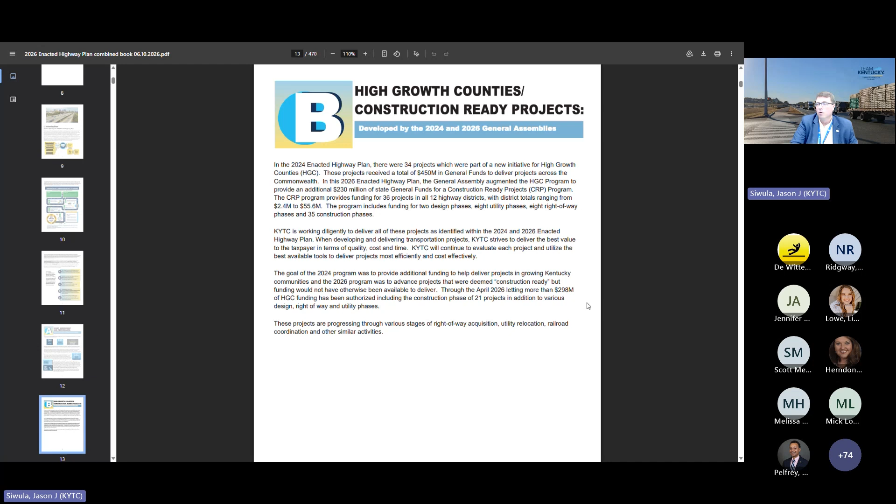The reason that's important is because those are dollars that are then able to be used in other ways to support other projects - the ones that would have potentially gone to delivering those projects. These are really important things to keep in context as we're talking about what's available to deliver highway plan projects. So in the system improvement area, one thing I want to call attention to is that everything here that's not a new project went through the SHIFT evaluation.

It went through the sponsorship process, it went through the scoring process. And one question that was asked commonly is: well, if a project wasn't sponsored, why did it end up in the recommended plan? So I want to talk about that for just a second with this group.

As we talk about sponsorship and all of those different things, that's very helpful not only for the cabinet but for the General Assembly to understand what the top level priority is for each area that does sponsorship. However, many of the projects that don't get sponsored were added through the legislative process, and so those are continued in future plans and carried forward to make sure that none of those previously identified projects were lost.

As the cabinet and the General Assembly continue to work on future highway plans, we're hopeful that things that maybe have been around for a while but are no longer local priorities or local needs can be addressed and removed from future plans. But I wanted to say that this portion of the plan is heavily influenced, and the delivery of this portion is heavily influenced, by all of those local and regional conversations that happen throughout the SHIFT process.

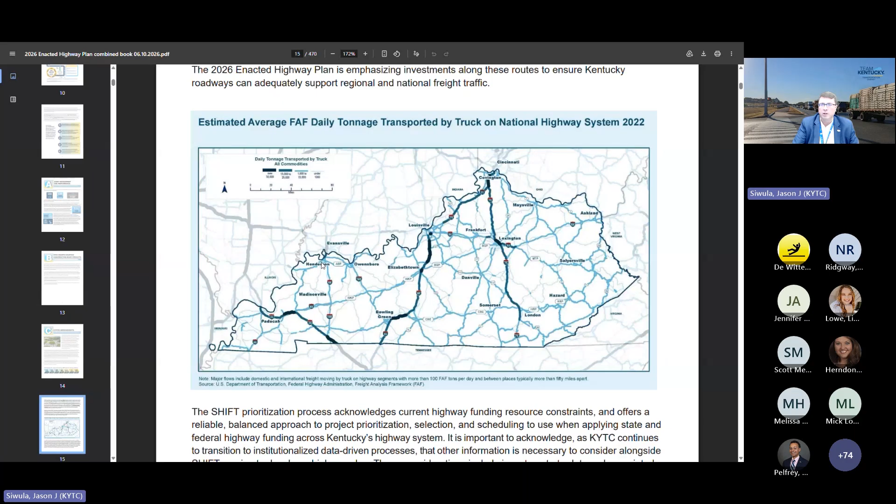I wanted to call attention to this map here that was put into this year's highway plan. A lot of what we talk about from a planning perspective is looking at not only vehicular travel, but all modes as far as pedestrians and cyclists, and also freight movements. This freight map was added to the highway plan to help explain where we have lots of freight moving, and help inform some of the decisions that have either been made recently relative to interstate and parkway expansion, or future decisions we're working on making there. So just wanted to point that out as well.

So the Z various funding area here within the highway plan is ultimately the things that we do that are either programmatic in nature, so think like HSIP, or our statewide funding for removing barriers to accessibility through ADA, but also things like rock falls that are not enumerated project by project, TAP, ITS, CMAQ. So all of these different types of things fall within the Z various program.

I'll make mention that this year, as an addition to this program, was a project that looked at how we address needs on state-owned and maintained dam infrastructure here in Kentucky, things that either affect transportation that we own, or things like roads that are on top of dams. So we did a study through planning over the last couple of years that looked at all of those assets and identified what future needs would be.

This project was added as a result of needing to address some of those things that were found through that study. So planning in action. Appreciate all of y'all for that.

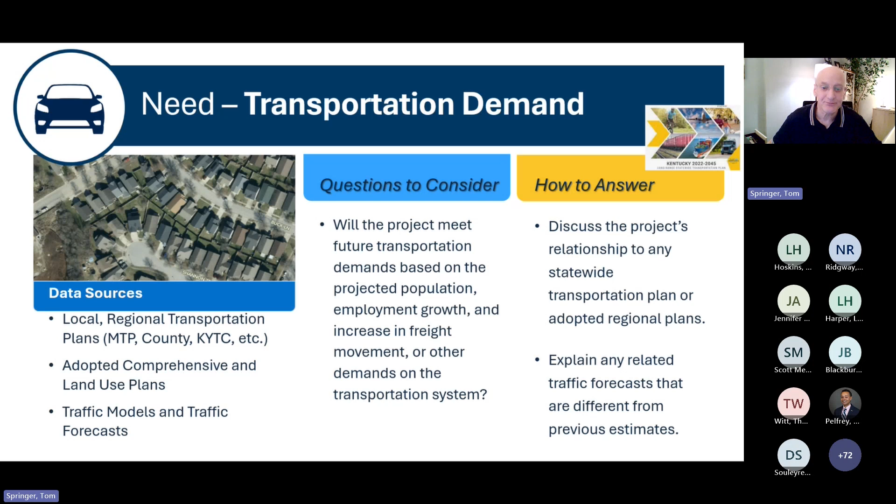So an example would be the purpose of the project is to provide intersection improvement along US 60 to meet future traffic demands along the corridor. In 2025, the MTP, LRTP state that all 23 signalized intersections along the road corridor need to operate level of service C or better to meet the demand.

It's based on population and employment growth. Estimate all this up though. That's not a real project example.

Sometimes it's real, right? Like that's the purpose of building the road, is we're going to open this area up for development. And if it is, it is. But going back to the previous one on transportation demand, it's like development's going to go here, so we need to build the road. So it's a little chicken and the egg. It can get confusing, but this is one where you seek guidance and you got to be very careful about it.

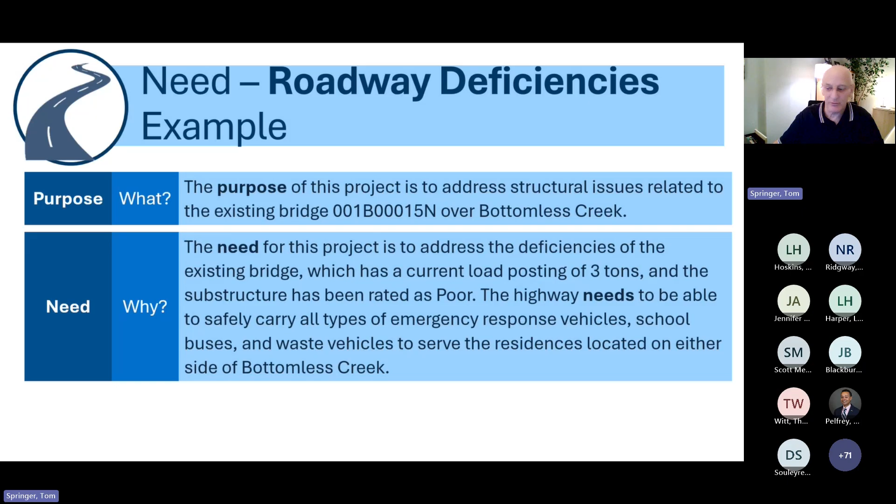And then the need, of course, would be the ratings that support that. All right, so I'm trying to jump through these because at the end, I really want to make everybody aware of the policies that are available.

Well, that's ubiquitous. That's every project is pretty much in that, right? So that is not legislation as a need, just because it's in the highway plan. Legislation should be reserved for very unique projects that have specific legislation toward that project.

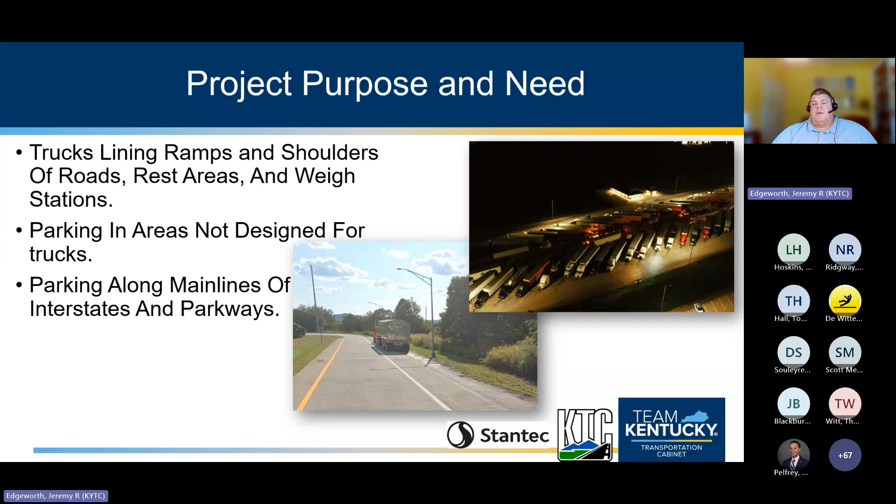So to talk about our truck parking problem, unfortunately, scenes such as these are all too common nationally, and Kentucky is not immune. As you drive down our roads, especially in the evenings or early mornings, you'll find trucks lining the ramps and shoulders of our roads, rest areas, and weigh stations. They are also parked in areas not designed for trucks, such as the passenger car areas of the rest areas. Often the parked trucks extend onto our mainline interstates and parkways, causing congestion on the ramps as well as safety hazards for truck drivers and the traveling public.

In fact, back in December near our Woodford County rest area, we sadly had a fatality with a vehicle crashing into a truck parked along the interstate shoulder.

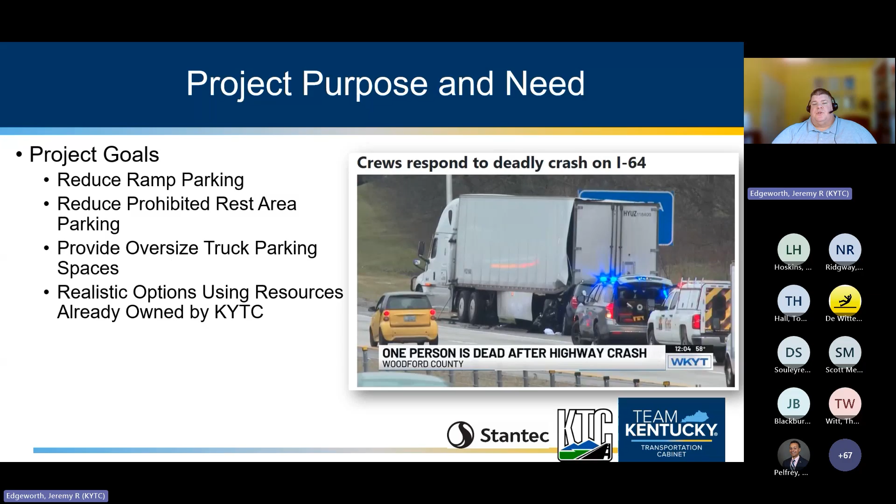Unfortunately, Kentucky buying acres of land and paving them for truck parking is not financially feasible. So for the study, we wanted to look at realistic, low-cost options to address the truck parking demand using resources the Transportation Cabinet already owns.

So to start, we looked at our supply. The project team calculated that we had 820 marked truck parking spaces at rest areas, 413 at weigh stations, 6,300 parking spaces at private truck stops, and 170 other private spaces. This gives us a total of just over 7,700 truck parking spaces available in Kentucky, located mainly along our interstates, with a few along the parkways and other major highways.

So to determine the demand side, the project team purchased truck probe data to see where trucks go and how long they're stopped.

Some may park at Walmart, Lowe's, or other big box stores, but overwhelmingly unofficial, unauthorized parking occurs mostly on our highway ramps and shoulders, especially near the rest areas. The parking on ramps and shoulders is a key safety concern.

The project team identified 27 potential sites for truck parking and created conceptual designs of 3 design types: which existing facilities could be expanded to increase truck parking, which vacant facilities could be utilized for truck parking, and what excess right-of-way could be used for truck parking.

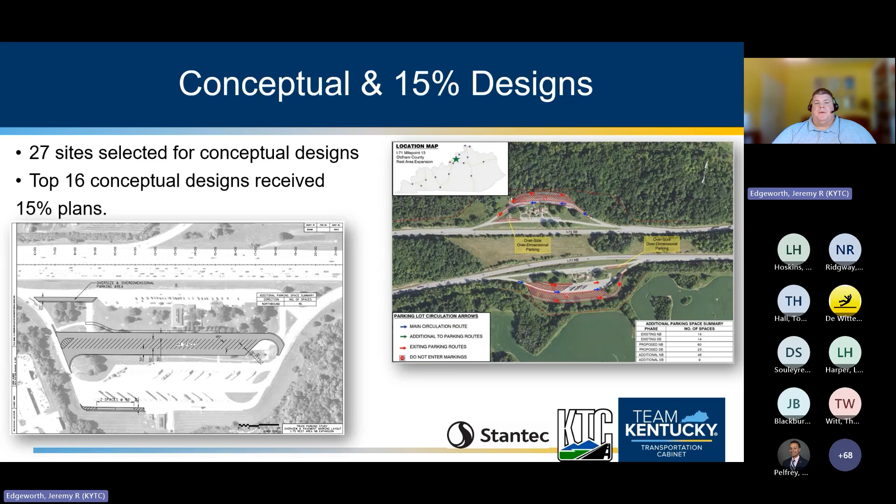The image on the left is an example of the 15% plan done for the Boone County northbound rest area. The Boone County rest areas immediately moved into final design as they had a separate road plan appropriation.

One year ago, cabinet leadership gave us the charge to complete the final designs and estimates for the most critical sites for inclusion in the road plan.

The map shows in red stars the distribution of the 12 sites currently in the design process to expand truck parking. The 2 blue stars along I-65 in Hardin County represent a different project to relocate the weigh station further south from Elizabethtown, but the new designs include over 100 truck parking spaces.

In Henderson County, there's a separate study to relocate the weigh station from US 41 to the new I-69 alignment, and efforts are being taken to increase truck parking at that new facility.

So with the Hardin and Henderson County facilities included, we have 4 design firms, HDR, Palmer Engineering, Stantec, and QK4, engaged in expanding truck parking throughout Kentucky.

I'll now turn it over to Len Harper to talk about Stantec's role in the project and the 5 sites they're working on.

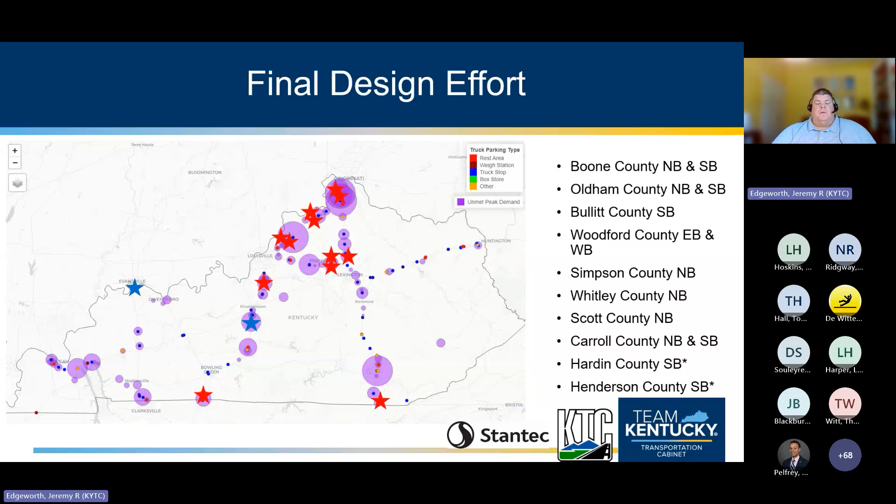Thank you, Jeremy. Can everybody hear me? Yes, sir. Yes. Yep. All right.

Through our statewide planning contract, we were asked to complete survey and final design for 5 truck parking expansion areas. 2 of those are on I-75, 1 was on I-65, and 2 on I-71.

The 2 I-75 sites were let to construction last month. From a design standpoint, we were tasked with maximizing the number of safe truck parking spaces at these existing facilities. To help expedite the schedule, we stayed inside existing right-of-way and minimized utility relocations as much as possible.

Our design vehicle was a WB-67 with a sleeper cab as shown in the top right. Thankfully, Clint Gooden is on here as well with me today from Stantec and will jump in if I misrepresent any of the design elements.

And Jason Blackburn, please feel free to jump in as well. He is the KYTC project manager. Next slide, please.

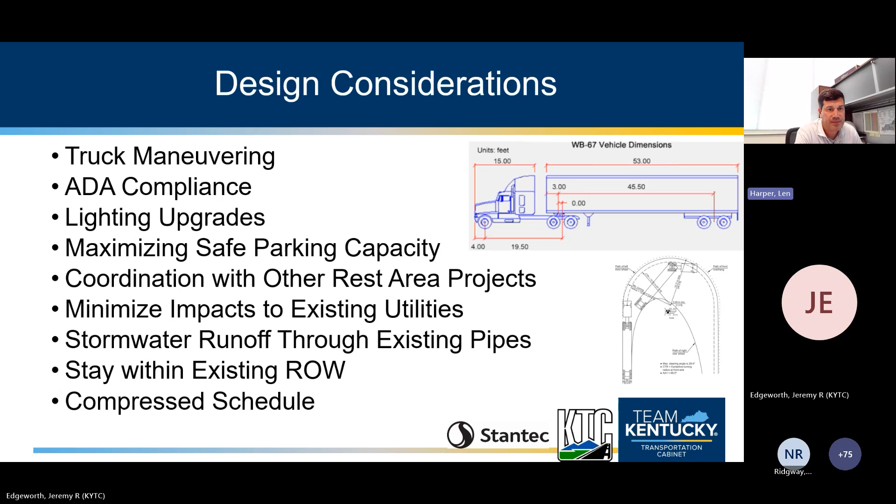Our first site is the I-75 rest area in Georgetown by the Toyota manufacturing plant. Some of the beneficial aspects of this existing location include the restroom facilities and the existing truck parking pavement is in good condition. There are 37 truck parking spaces there today. Some challenges: we have pretty tight right-of-way and steep terrain on the back end of the site that we have to take into account.

The pink lines on this drawing show the new parking configuration. I know it's hard to see all the details, but by adding parallel spaces on the ramps, expanding the parking area north, south, and east of the existing truck parking area, we were able to add 54 spaces, and that includes 2 ADA truck parking spaces and 1 oversized load space.

Zooming in a little bit, this is one of our grading plan sheets, which were developed for each site. You can see how close our cut slopes get to the existing right-of-way line where we expand the parking area.

We even had to construct a 13-foot retaining wall on the backside to stay within right of way, which increased our overall cost. As I mentioned earlier, this project was let to construction last month at a cost of $6.8 million, which was $1.8 million less than the engineer's estimate.

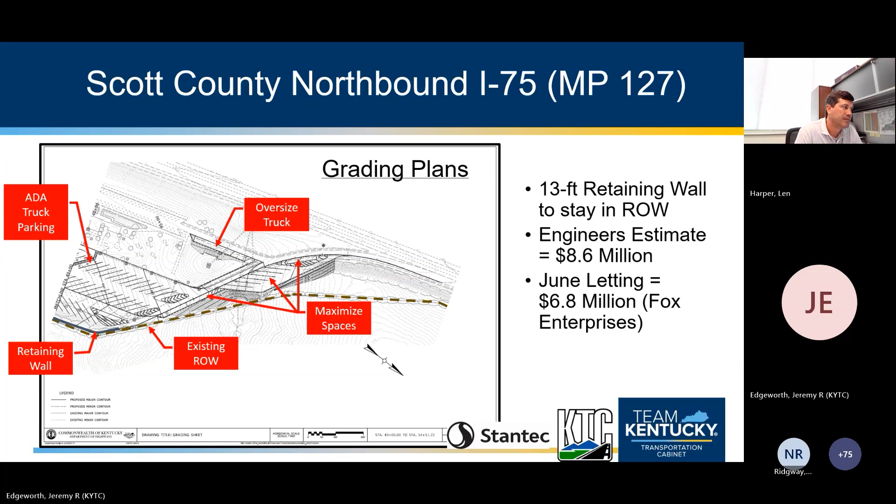Moving to Whitley County, this is our second site. It's the I-75 Welcome Center in Whitley County, just as you enter Kentucky from Tennessee. This location also has restroom facilities, and the existing truck parking pavement is in good condition as well. There are 31 spaces there today.

The orange lines on this drawing show the new parking configuration. Here we were able to get 40 more spaces, including 2 ADA truck parking spaces and 1 oversized load space.

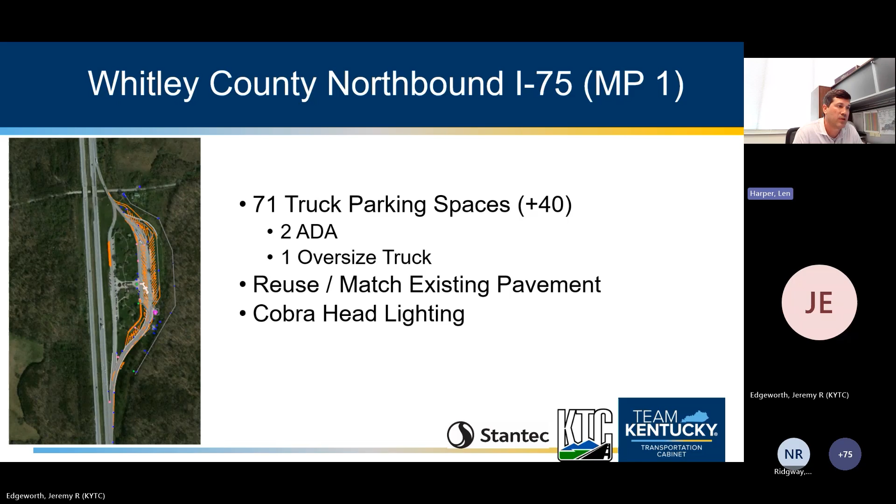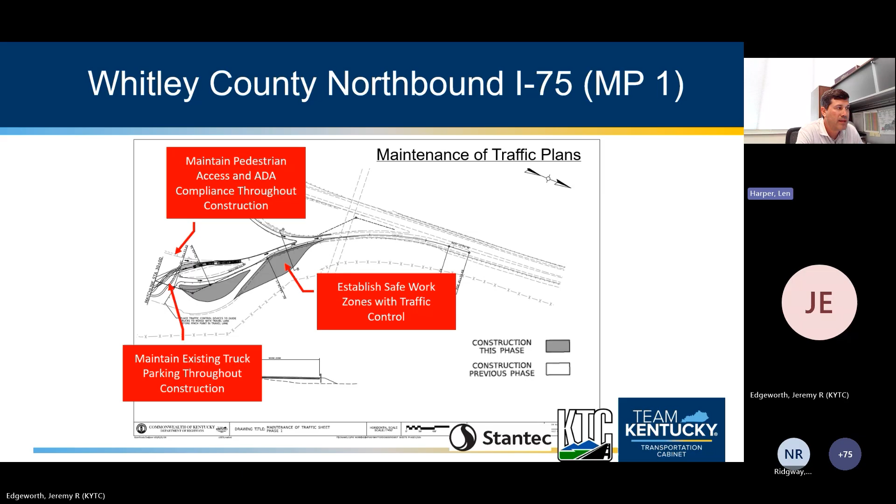As part of each plan set, we developed MOT plans. The construction areas on this plan sheet are shaded in the drawing. We wanted to maintain as much truck parking as possible during construction, so we staged it accordingly. You can actually see the auto turn movements we use to verify trucks can still get in and out of those truck parking spaces during construction. And we also had to maintain ADA compliance during construction, including access to sidewalks.

In addition to the MOT plans and the grading plans, we also developed signing, lighting, and striping plans at each site. You can see the sign for the oversized load circled in red there, which is to be directed to the left with vehicles, and all other trucks are directed to the right.

We also identified additional lighting that was needed. You can see those highlighted here. In this location, we just added Cobra head lighting. In other locations, we looked at high mast lighting.

This project was also let to construction last month for a cost of $2.2 million, which was $700,000 less than the engineer's estimate.

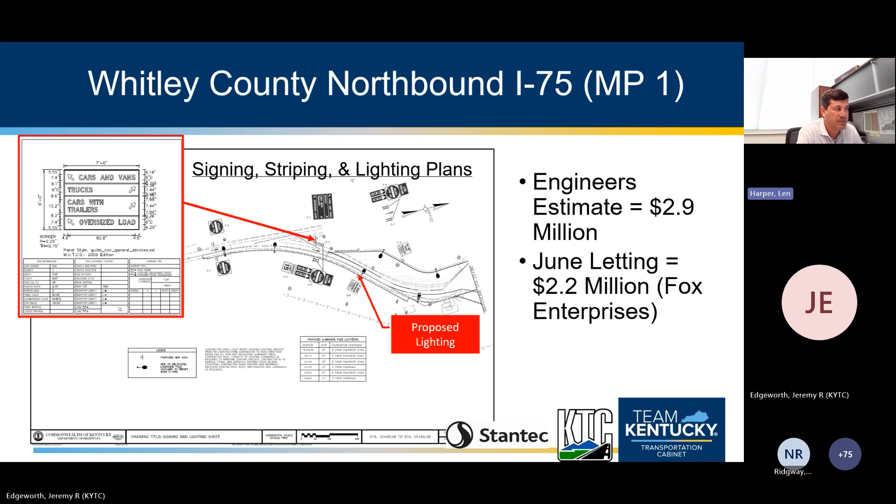At this point, before I jump to Simpson County, I'll open it up. Are there any questions about the 2 sites that have already gone to construction?

Len, just a note on the lighting: Scott County had a separate lighting plan that was done for it. It was brand new lighting on the Whitley County project, it was just augmenting the existing Cobra heads that were out there.

Thanks, Clint. Any others?

All right, hearing none, our third site is the I-65 Welcome Center in Simpson County. It's just as you enter Kentucky from Tennessee. Some of the benefits at this site, again, we've got existing restroom facilities, the truck parking pavement is in good condition, and we do have more right-of-way at this location than we did at the first 2 sites.

One challenge, though, is coordinating with an ongoing sewer project at this location. This is a plan sheet showing the proposed 8-inch sewer line that crosses the truck parking area and connects with a new pump station just north of the existing Welcome Center. Right now, the finance cabinet is paying around $10,000 per month to pump sewage out of the Welcome Center. So we wanted to coordinate with this project. Obviously it's very important, but their project is lagging ours, so we're looking at our truck parking expansion, which should occur before this project actually goes to construction.

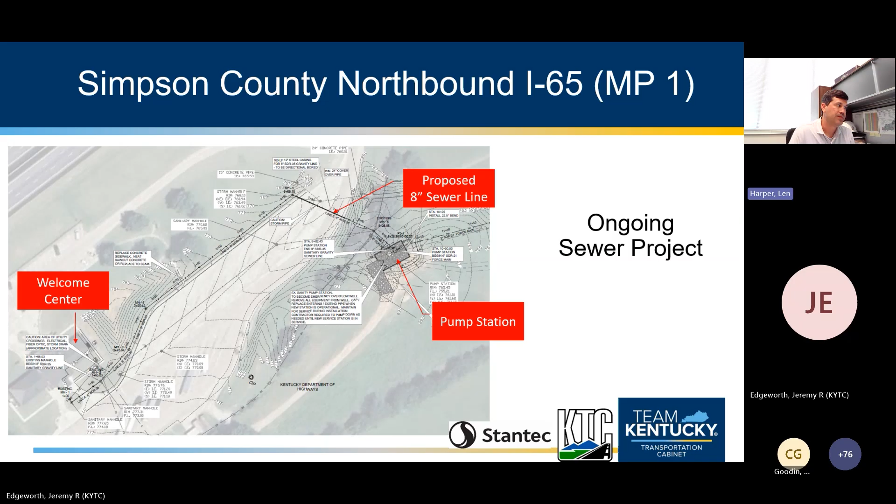So taking that area out, our design plans for this location are still under development, but we were able to get 30 more spaces, again including 2 ADA truck parking spaces and 1 oversized load space. The preliminary cost for this location is $2 million.

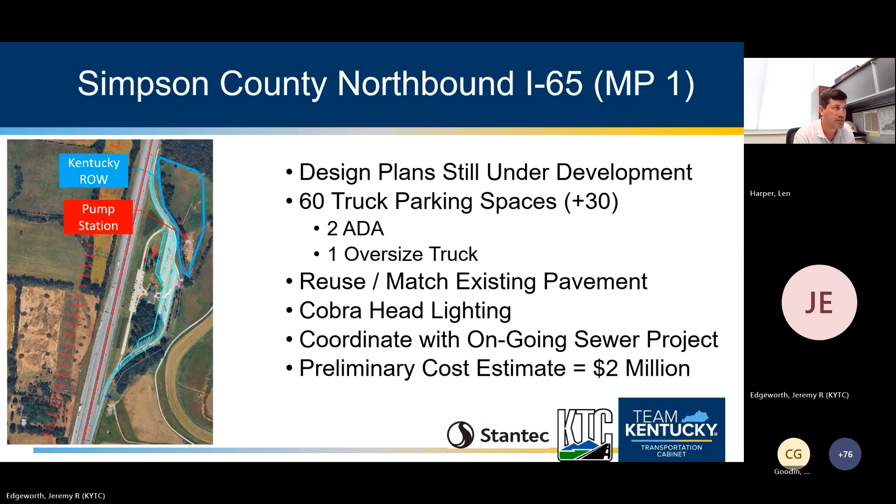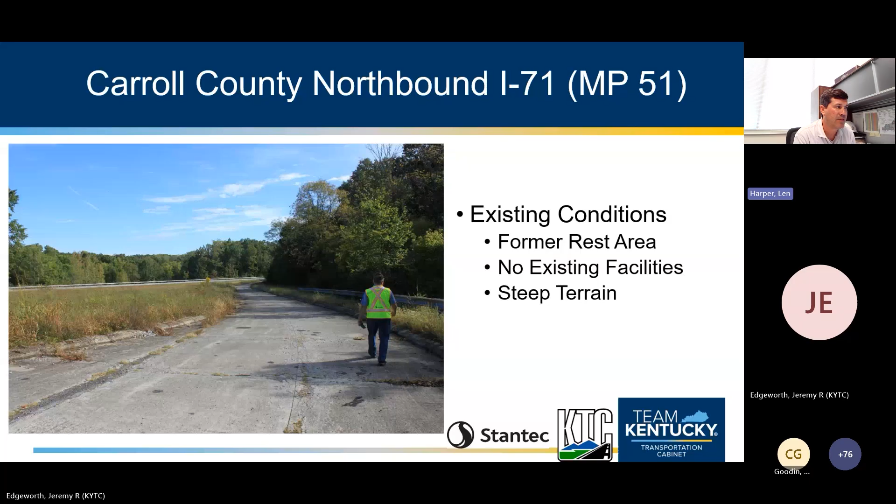The last 2 sites are actually 2 abandoned rest area sites on I-71. This is a picture of the northbound I-71 site, and this is a picture of the southbound I-71 site. The main benefit of these locations, of course, is that KYTC does own the right-of-way, and it's already been graded. But some of the challenges are there's no restrooms, we do have steep terrain at this location, they both sit on a hill, and we'll need to replace the existing pavement at this location, which will increase the cost.

The 2 Carroll County sites have not been surveyed yet, so these layouts are still preliminary. The proposed parking spaces are shown in yellow.

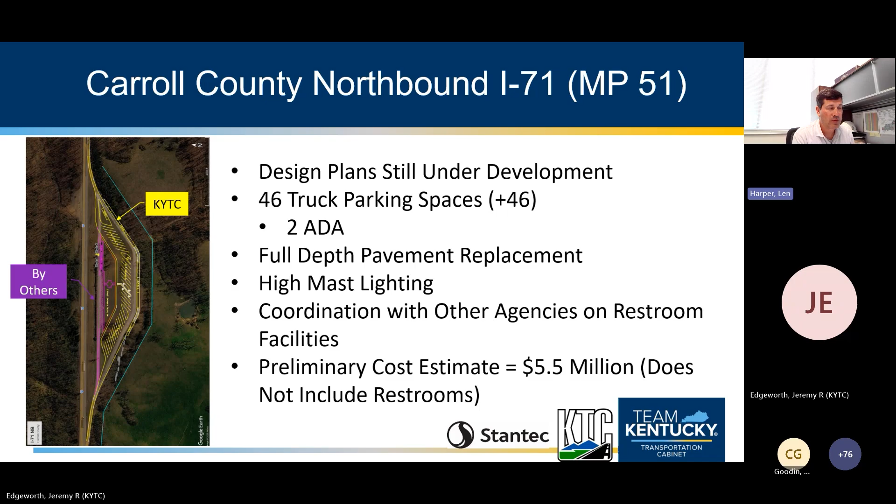We believe we can get 46 spaces, including 2 ADA parking spaces, at the northbound I-71 location. The purple lines on the layout show potential vehicle parking and bathrooms, but that would have to be done by others - that's not part of this project. Our preliminary cost at this location is $5.5 million, and again, that does not include the restrooms or the vehicle parking shown in purple.

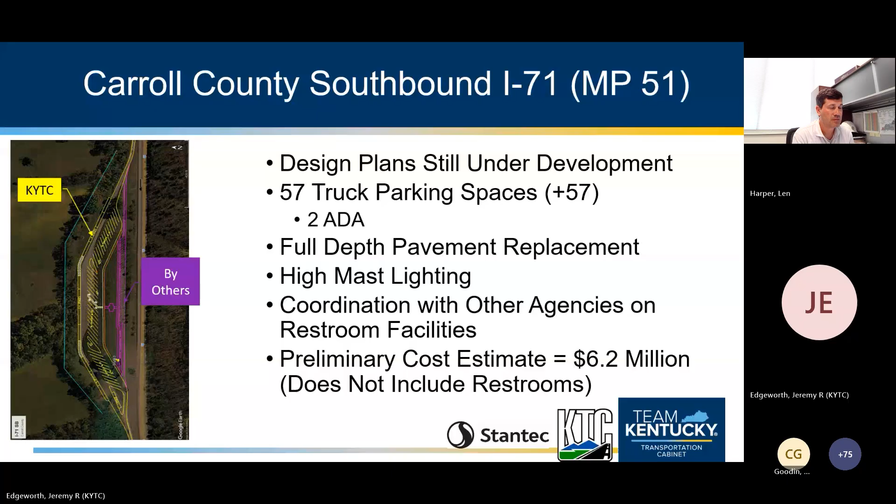For our southbound I-71 site, we believe we can get 57 spaces at this location, and the preliminary cost, not including the restrooms or the vehicle parking shown in purple, is $6.2 million at this location. And with that, I will pass it off to Jennifer.

So in conjunction with the expansion of physical parking spaces, another piece is trying to make sure that drivers are getting parking information, that we're getting that information out and that it's accurate. So the Kentucky Transportation Center has a project on that, and that's what I'm going to share with you today.

Kentucky does have a current system at 13 locations that provides information on truck parking. The technology that is rolled out there right now counts traffic as it comes in and out of those lots. And what we have found, and I'll have a little bit of data on that in the next slide, is those systems are not working as well as we'd like.

But the data that we're getting from those systems is being checked at least once daily by the folks at TRIMARC and updated to try to ensure that we are sharing accurate information. But this was really one of the things that led us to this project, to improve the information that's being shared on available truck parking. So next slide, please.

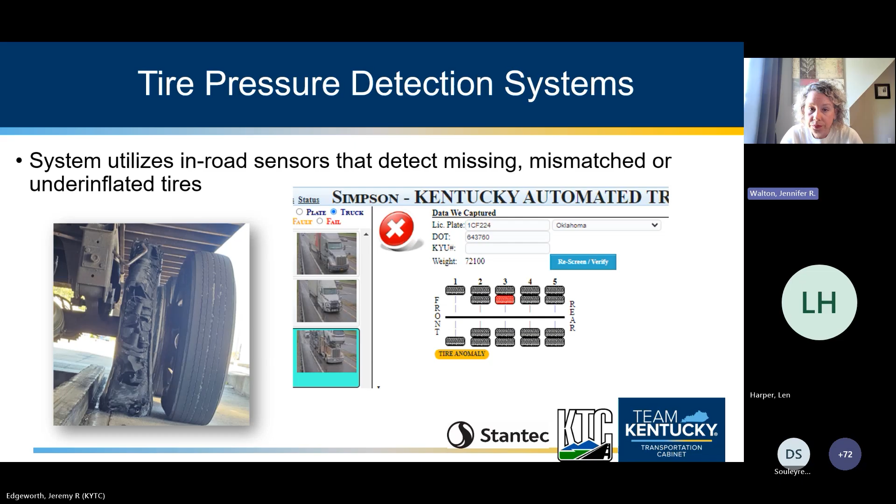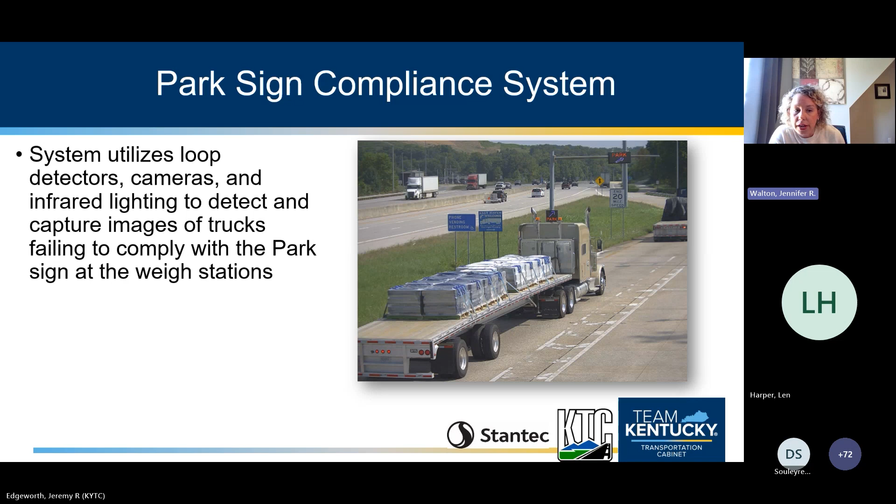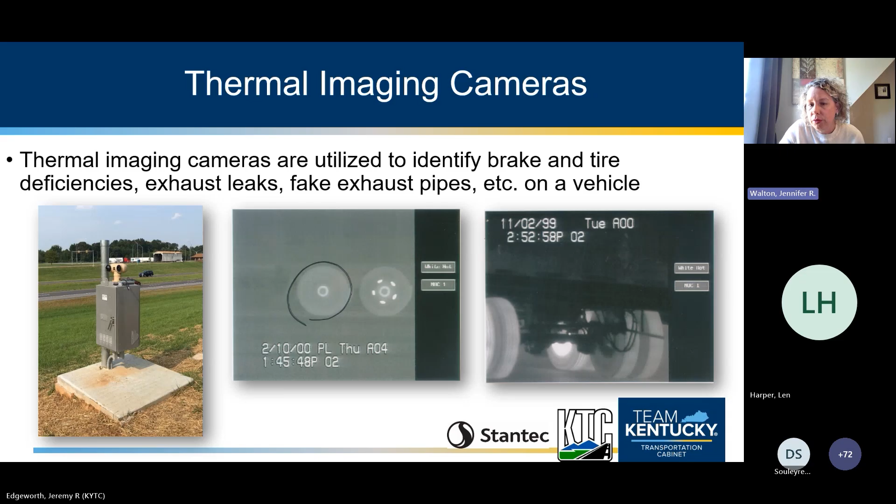This might be my last one, but we also have thermal image cameras utilized at the facilities. They are looking for brakes that are inoperable and also flat tires, they can be used for both. These take a little bit more work to utilize and some experience to get good with, but we have inspectors and officers who have gotten very good with using these. In some images, like the far right one, you see a bright light, and on another tire you don't see that. That's evidence we have a brake working on one and not on another. They've been trained on what to look for, and the ones good with it can pinpoint them pretty easily, so these help them find primarily faulty brakes.

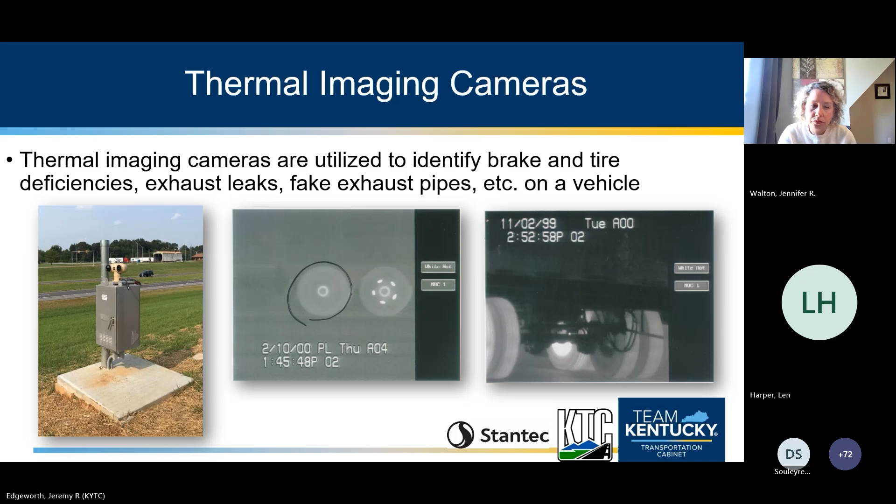We also just began the process with HDR to update our statewide truck parking assessment and action plan, or version 2.0. This will look at the next round of areas in need of increased truck parking, possibly I-24, I-69, or other parkways, as well as have more focus on urban truck parking issues and solutions. We are also just beginning a study with Stantec to specifically look at how we can effectively deter trucks from parking in unauthorized areas on our ramps and shoulders, creating safety issues. This will look at what we're legally allowed to do, what other states have done, as well as assess our deterrent alternatives, whether it's signs, guardrails, curbings, etc.